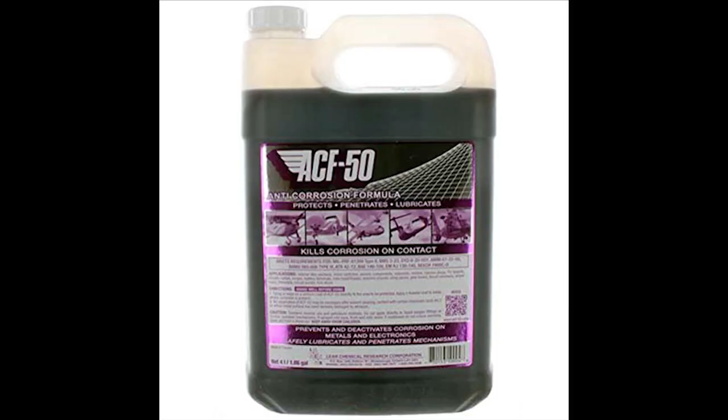This technology is commonly referred to as FTFC, Fluid Thin Film Coating. The two popular products are CorrosionX and ACF-50. Here is how it works. Aluminum metal parts of our aircraft are in constant contact with each other, whether it is an overlapping sheet or the contact a rivet makes in its surrounding hole.

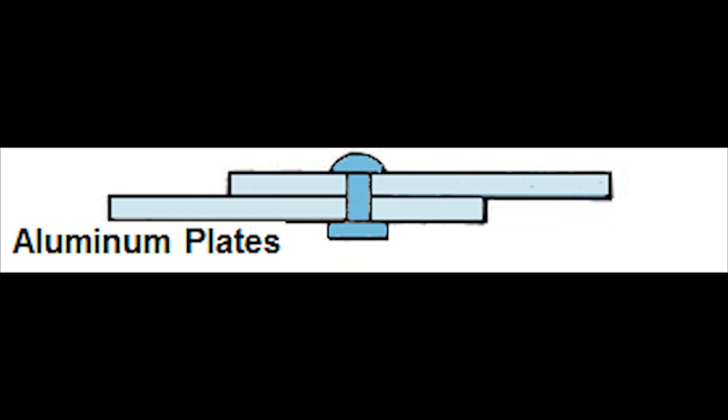If there is an electrolyte present between these parts, and water moisture being the most common electrolyte, the electrons will naturally move between these two adjoining parts through the electrolyte, and the metal breaks down, one electron at a time, and we have corrosion. Priming the parts with paint can help as a barrier to the moisture, but wear and vibration eventually takes its toll on this coating.

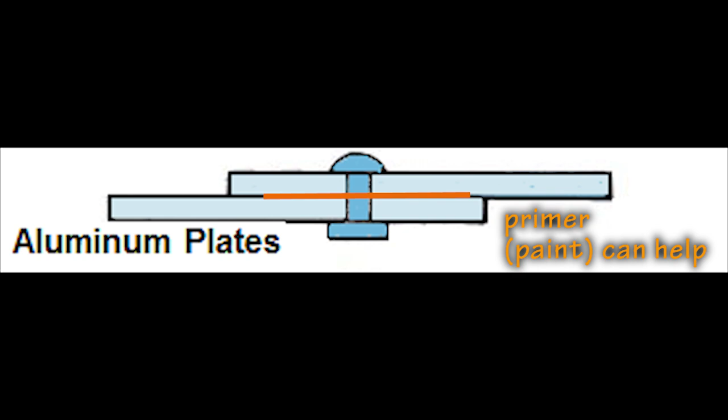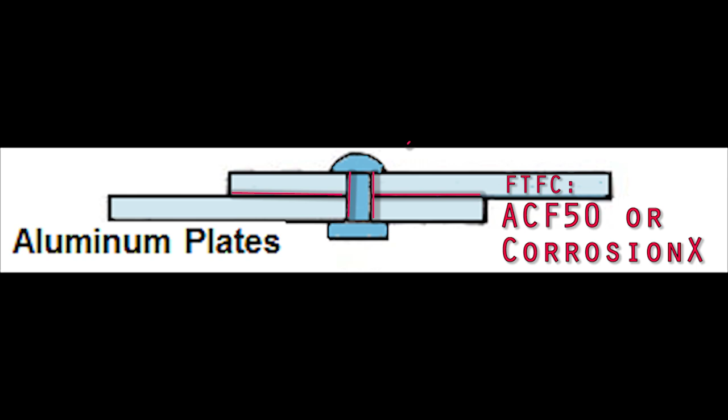A fluid thin film coating sprayed onto these parts will seep into all crevices and joints, no matter how small, including rivet shanks in their holes. This oily treatment, applied every 2 years or so, provides two functions. Number one, it displaces water so that during its application, moisture is moved out of the metal joints and off rivets. This is also what WD-40 fluid accomplishes.

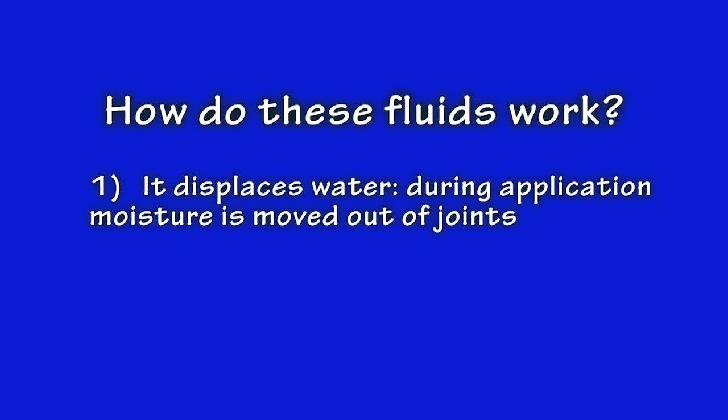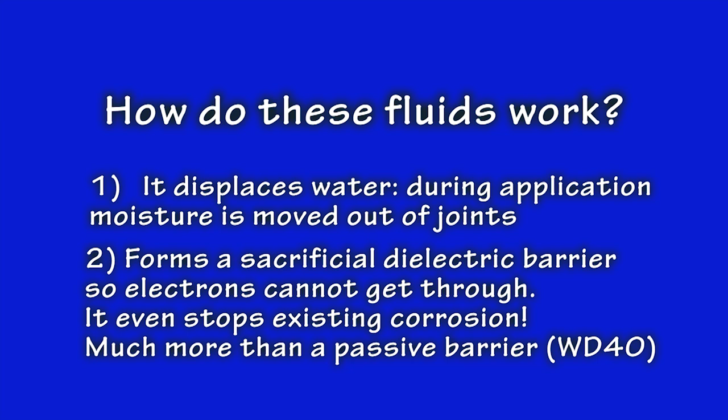Number two, it forms a sacrificial dielectric barrier so electrons cannot pass, so there is no more corroding action. This allows it to even stop existing corrosion from progressing. Water that may appear in the future in these joints cannot become an electrolyte. This fluid is doing a lot more than just acting as a passive barrier to moisture. The fluids are harmless to avionics, electronics, and plastics. However, do keep it off your brakes.

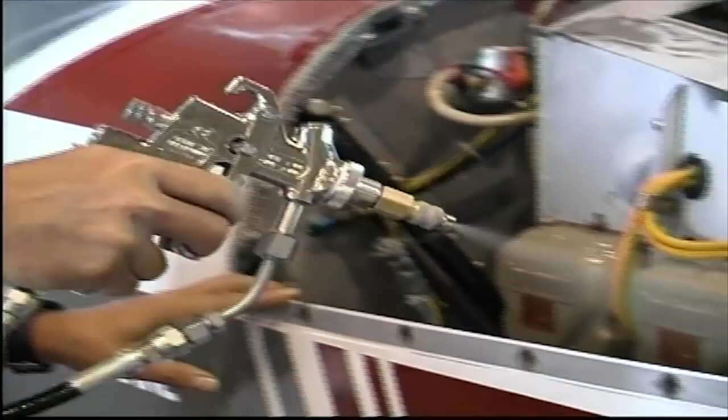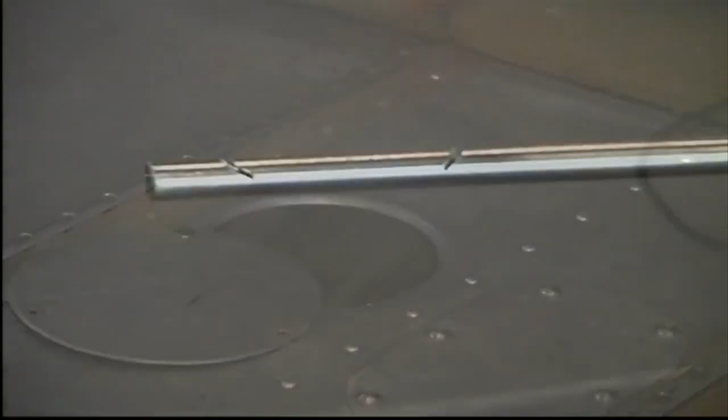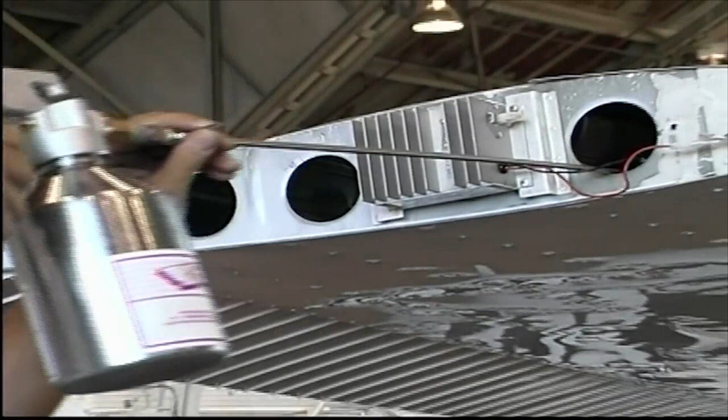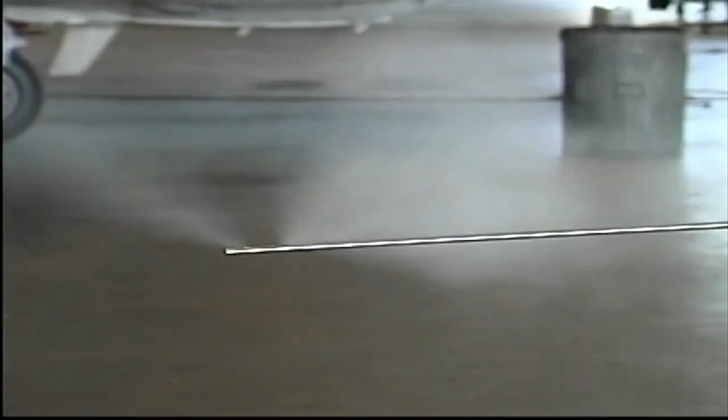Proper application is the challenge. The most common method is to apply the fluid to the interior of the aircraft structure as a fog or mist, so that it can find its way into every nook and cranny. Reaching long aircraft structures like wings and fuselage may require thin spray wands and the removal of access panels. There is spray equipment available for this purpose, but builders have improvised using garden sprayers and aerosol-type tanks. Here are some clips from the manufacturer's video that provide some additional understanding of using their product.

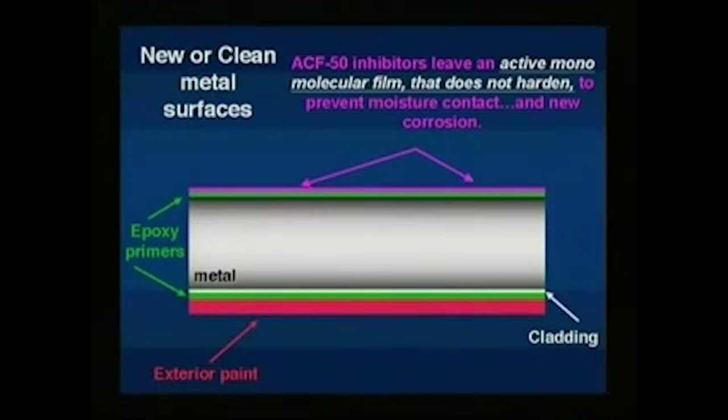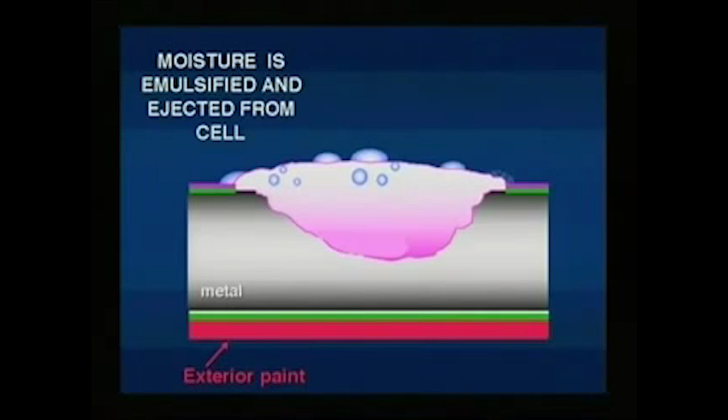On uncorroded metal, the corrosion inhibitors in ACF-50 leave an active film that does not harden, preventing any further corrosion by keeping moisture away from the metal. On a metal airframe with existing corrosion within allowable limits, ACF-50 displaces or emulsifies the moisture, allowing it to migrate to the outside of the protective film. The corrosion-causing moisture is forced to evaporate, and ACF-50 fills the cell, providing an atmospheric barrier which prevents any further corrosion.

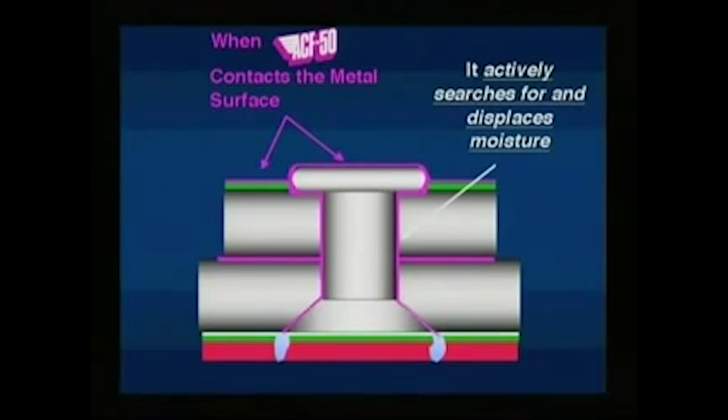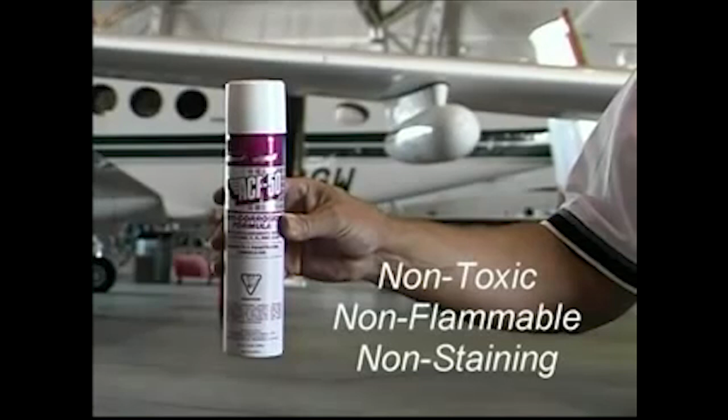ACF-50 flows easily into mechanical voids and even between the strands of cables, searching out and displacing hidden moisture. ACF-50 is a non-toxic, non-flammable chemical compound that has remarkable properties, not only in corrosion prevention, but also in stopping corrosion already in progress. It is very effective and also works well as a lubricant, and it is very easy to apply. It can even be freely used around avionics and aircraft electrical systems, as ACF-50 contains nothing that can create an electrical path or detune sensitive radio equipment.

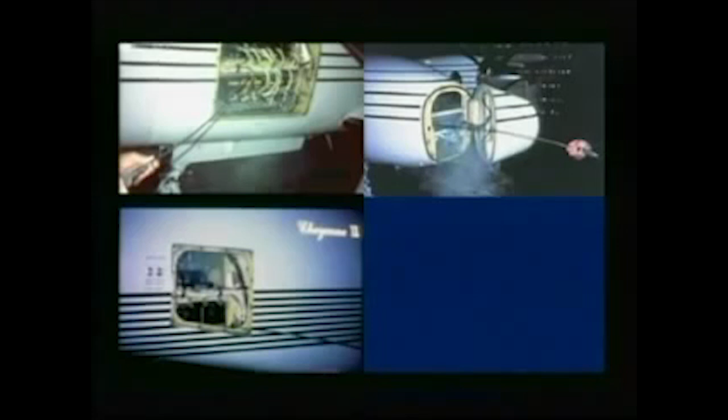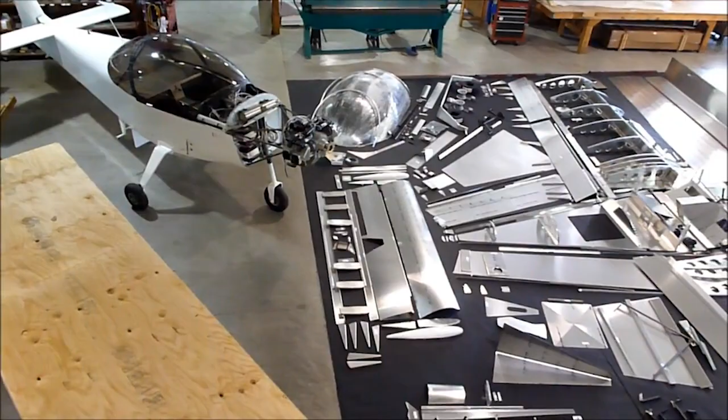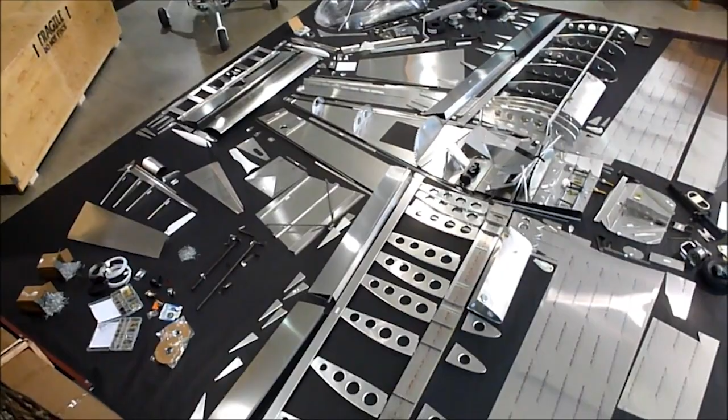These products provide a wonderful method for protecting our home builds for years to come. If you're going to paint your aircraft, be sure to paint the aircraft first before applying these products. Otherwise, you may want to wait a year or so to make sure there is no more weeping or seepage of the fluids prior to your painting.